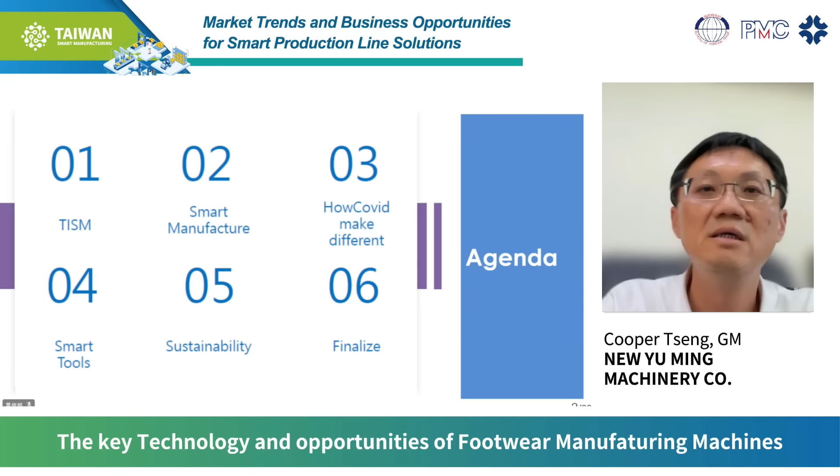I will talk about TISM, smart manufacturing, post-COVID development, smart tools, sustainability of our factories, and conclusion.

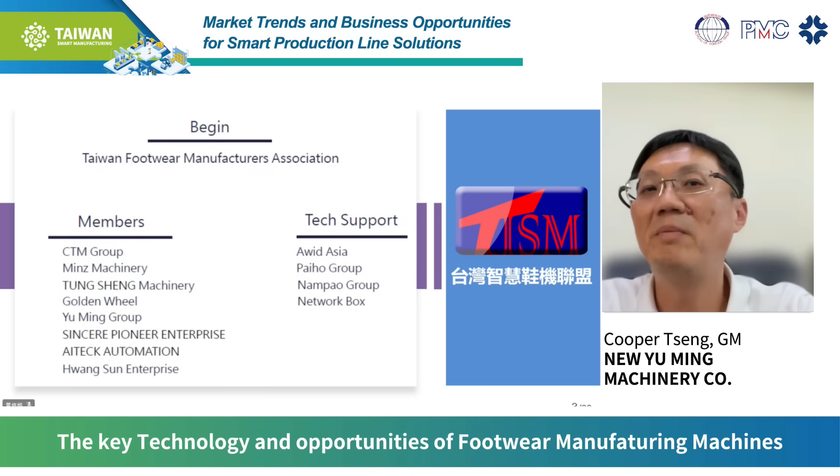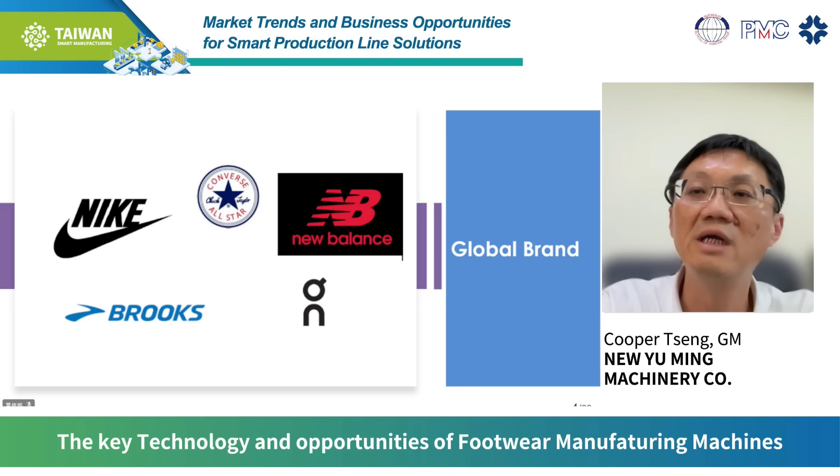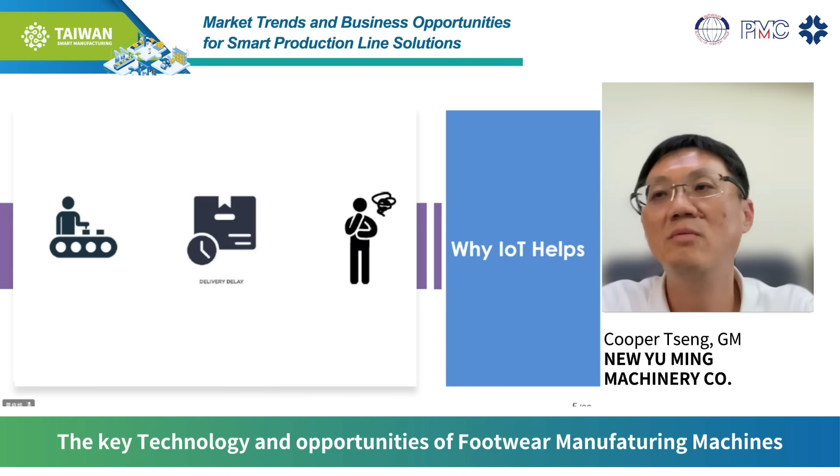Currently, with Nike, Converse, New Balance, Brooks, and On Running, we all have projects going on. And in the future, how can we help you, and why should we help you? I will explain it to you.

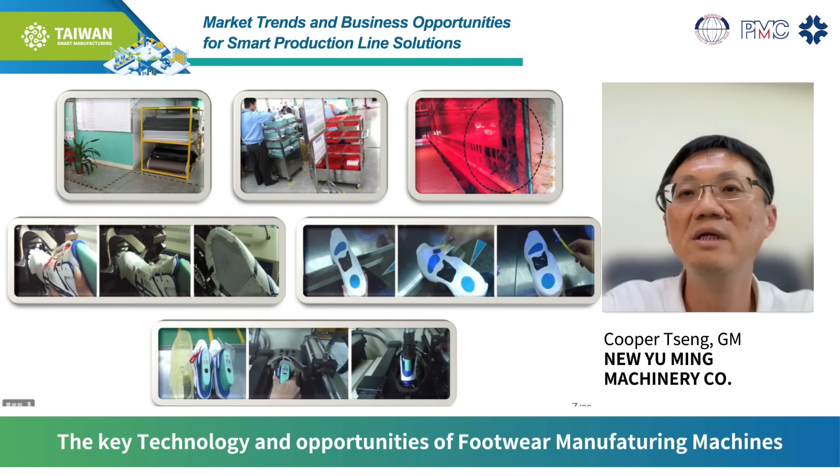Currently, shoes manufacturing factories have encountered a lot of questions, such as water consumption, conveying belt examination and cleanliness, and how can we reach standardization in our industry in the future? These are the questions we are facing now.

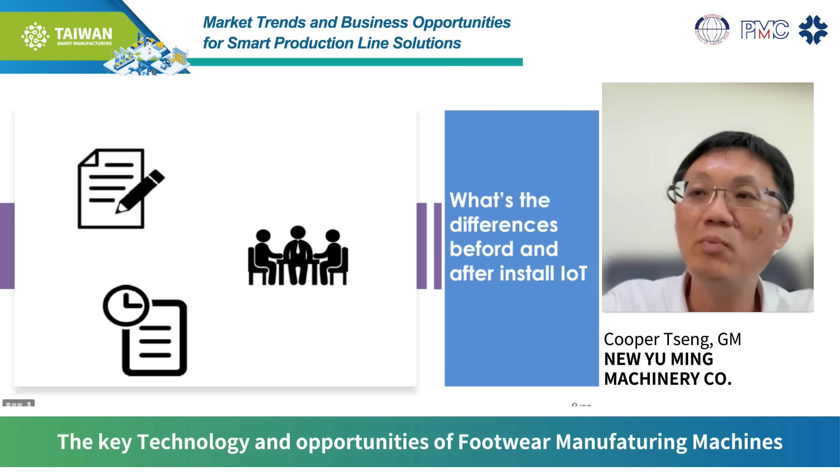In terms of IoT, before and after the installation of IoT, what are the differences? Let me explain briefly.

Currently, in our production lines, there is a question: production and planning are not connected. On-site data is not real-time and accurate. Especially in our production lines, we are still using manual methods to record data.

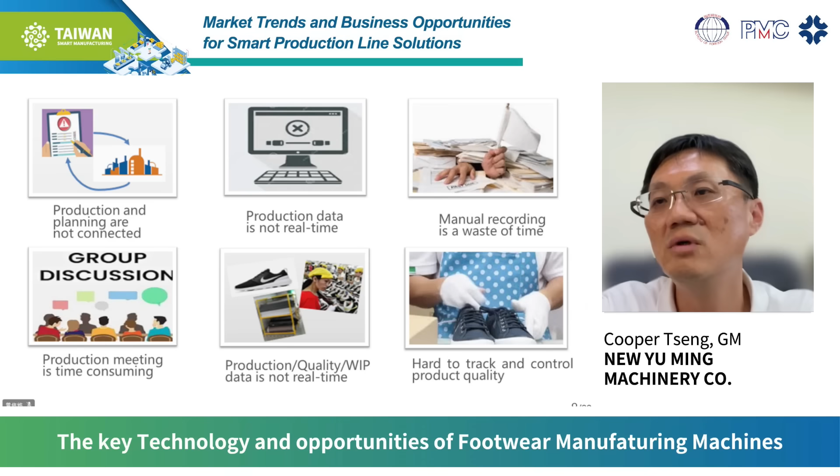It's time-consuming. In terms of coordination of our production and planning, we need real-time data in terms of production, quality, and materials. The most important thing in our production line is quality. How can we trace the quality of our products? This is the problem we are facing now in mainland China, in Southeast Asia, and even in India in the future.

The IoT Smart Production Line. In terms of IoT Smart Production Line, currently, from cutting to stitching and to lasting machinery layout, we have accomplished 22 production lines, including those located in mainland China, Vietnam, Indonesia, and Taiwan.

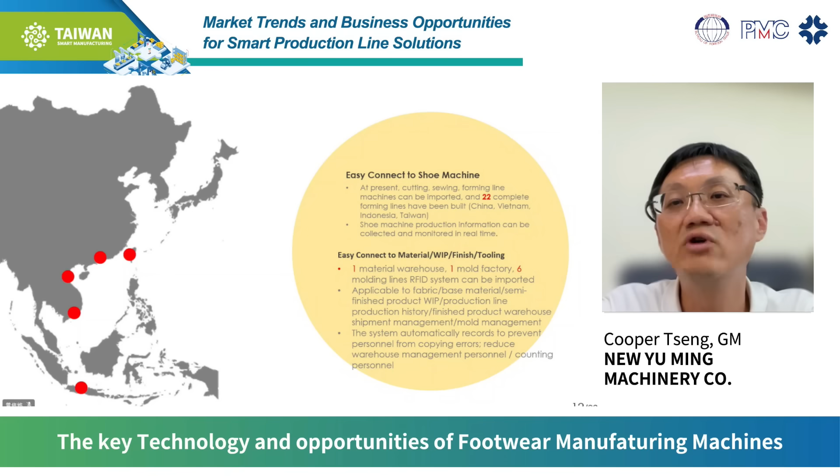We use a WIP online system. The system can record all information automatically to prevent human error, to reduce inventory and other labor force. We can reduce the indirect labor force.

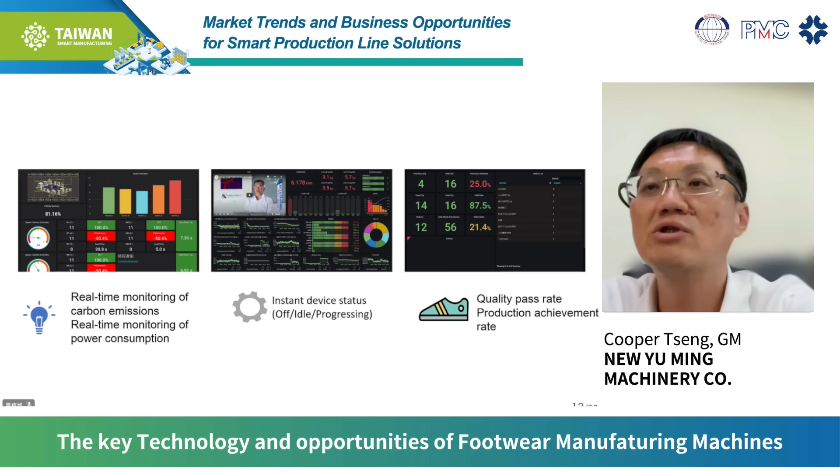In those 3 screenshots, the left one shows real-time monitoring of carbon emissions and real-time monitoring of power consumption. The middle one shows the instant device status. From the right one, we can get quality pass rate and production achievement rate. They are all the data we can get online right now.

We can get our machine's operational data such as speed, temperature, pressure, etc. Whatever information our clients want to know from our production line, we can present it digitally. As to our production movement, such as accumulation, material shortage, and even line balance, we also have the information.

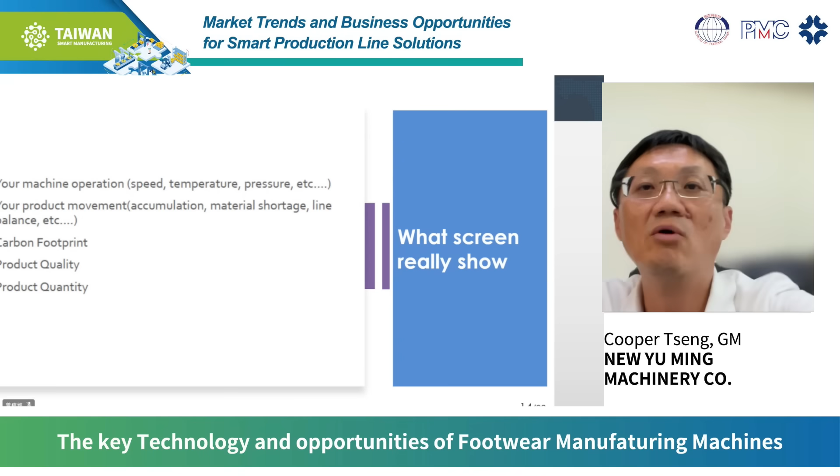Currently, in terms of carbon footprint, product quality, and product quantity, we can present the data. That's the reason why we create the war room in our app.

What can we achieve with the IoT smart production line? Aside from the remote control system of our machines, we have material data management. It's very important for the shoe manufacturers. We can provide production data optimization analysis. In our production line, we have a production line monitoring platform, such as the maintenance data and TPM. They will all be included.

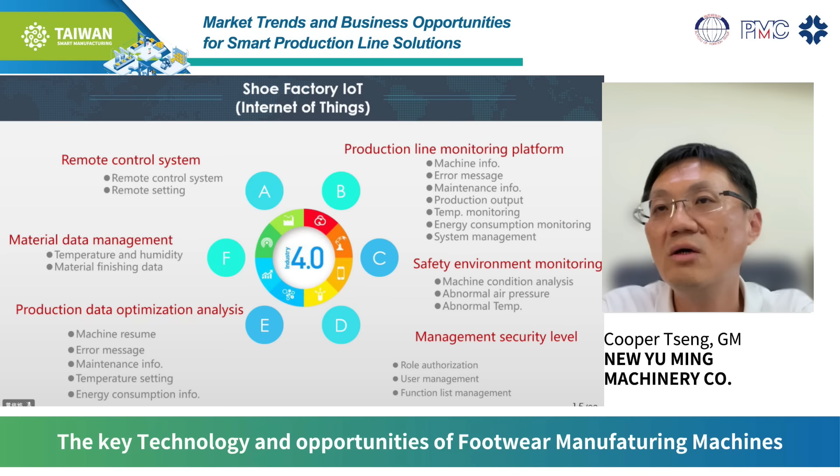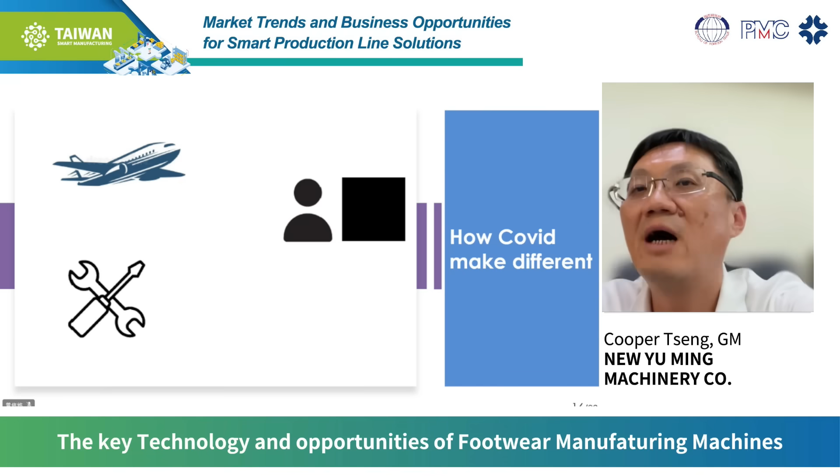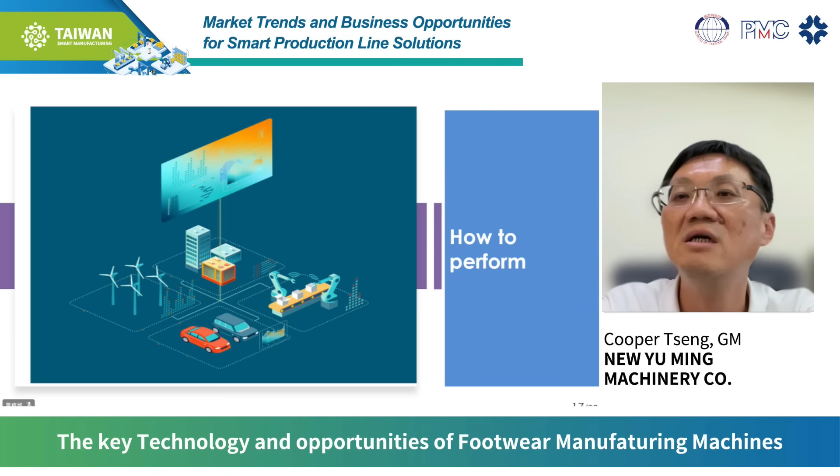In terms of the post-COVID era, what differences have we made? The following are the differences made in the IoT smart production line which are different from the past. In the future, how can we put them into practice?

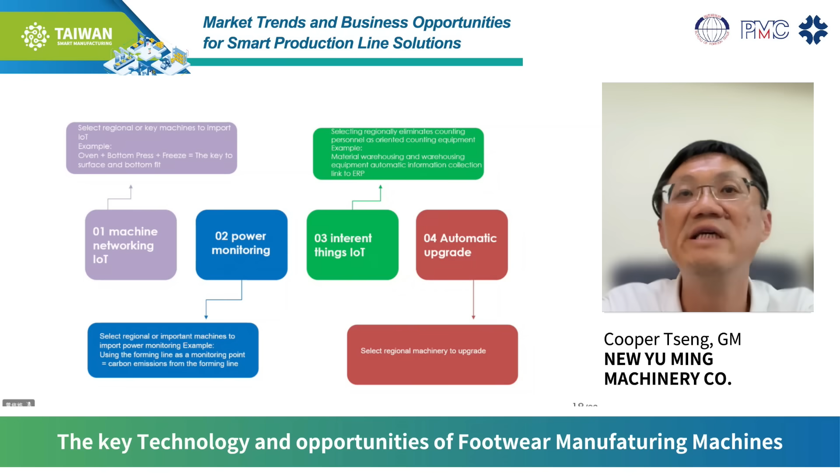Through real-time monitoring and IoT, we have upgraded our automation system. Aside from that, we have already connected to the warehouse automation system and ERP system. With the ERP information, we can better control the whole system.

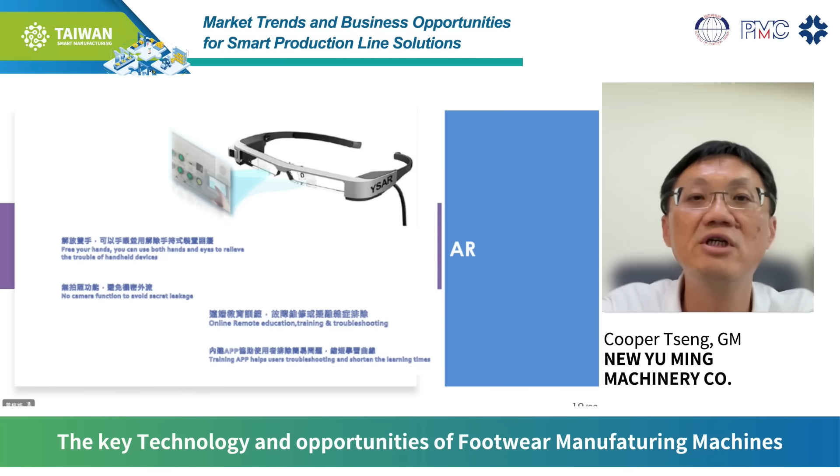Because they are all done remotely, we created an AR system for such as new machines and for training as well. It's a built-in app which can shorten the training curve for newcomers. This is what every shoe factory wants us to establish for them.

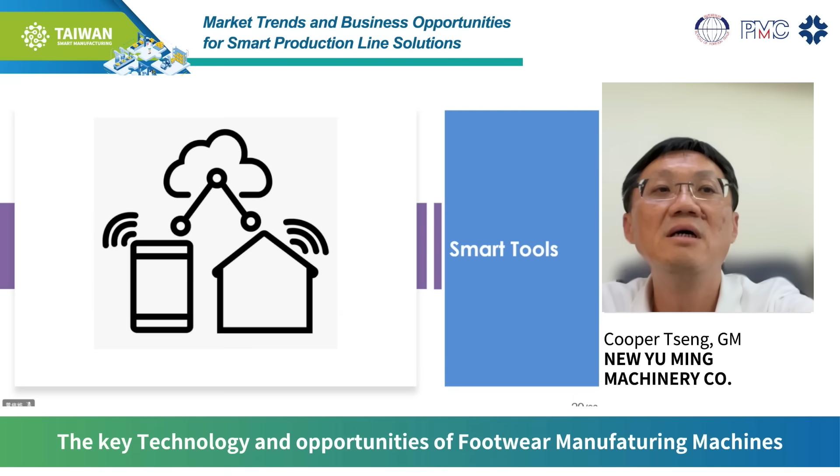In terms of smart tools, for instance, we are using RFID to provide automatic identification, starting from material input to storage management, the shipping of the product, and ERP's management of the product - packaging, assembling, even cutting and stitching, and printing.

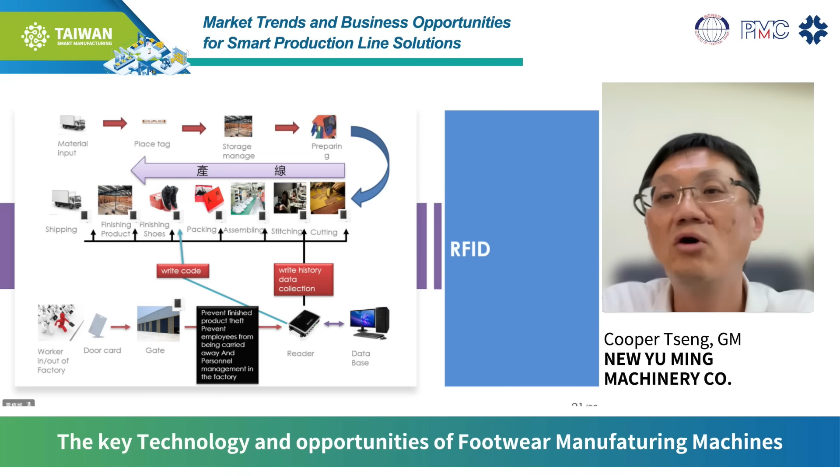Next, it can also provide security service for the factory. A very important point is that in the future, for the consumers and the client's warehouse, we can provide very good tracing information. And we can provide more exact control of the warehouse to prevent stealing from staff.

Next, in terms of RFID for warehouse management, you can see from the slides that not long ago, we established the RFID system for a mold factory in Vietnam. Typically, a mold factory has 3 or 4 warehouses containing up to tens of thousands or a million molds - upper molds and lower molds. In locating a certain mold with RFID, we can save time for them, from 3 days in the past to 2 hours right now. Everyone was amazed by that.

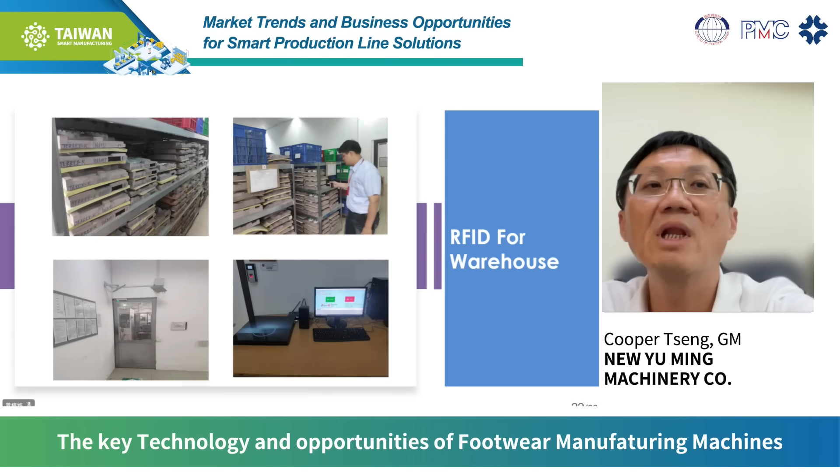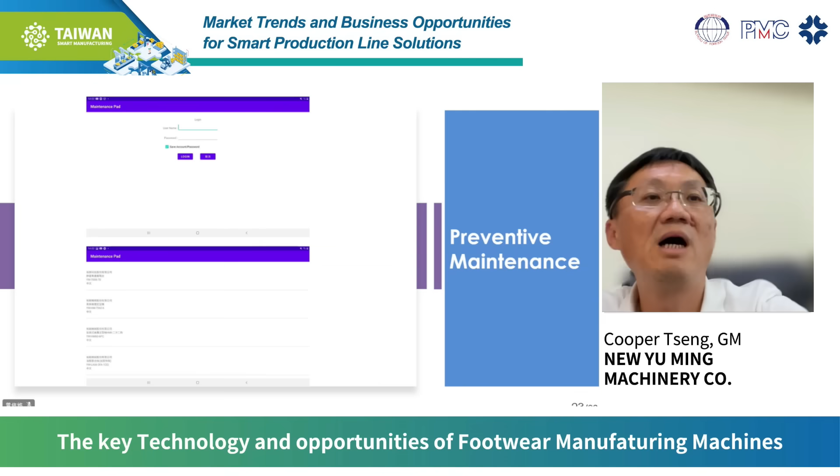As to preventive maintenance, we have created a system for it. Next, we have created a Line Alert app for machine maintenance. On each machine, there is a smart box which can transfer the machine's conditions to the app, such as when and what RFID has passed the machine with the conditions. On the left of the screen, you can see you need to do maintenance - what kind of maintenance. On the right, such as production line number 1, which machine has an abnormal situation.

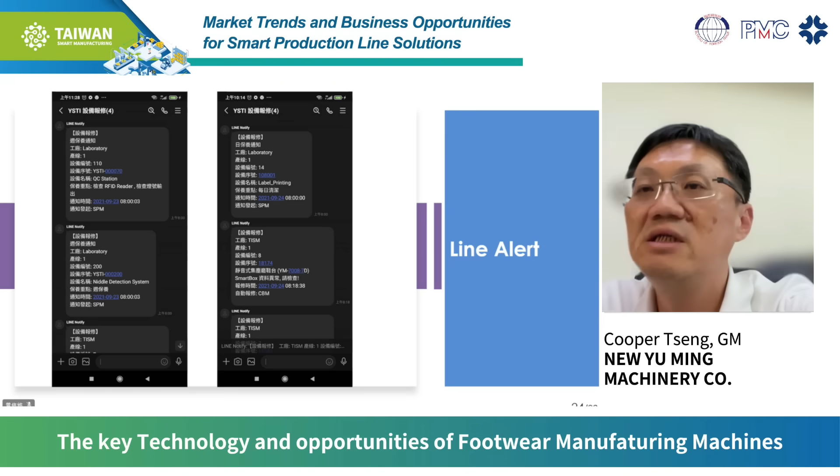This is an advanced system to reduce human error and provide real-time interaction. Next, by using an automated guided vehicle, AGV, we came up with a very good idea. With AGV, we can standardize our labor tempo to reduce workers' human errors. Otherwise, it will slow down our production line speed. It can maintain the speed to keep a good OEE and reduce fraction defective.

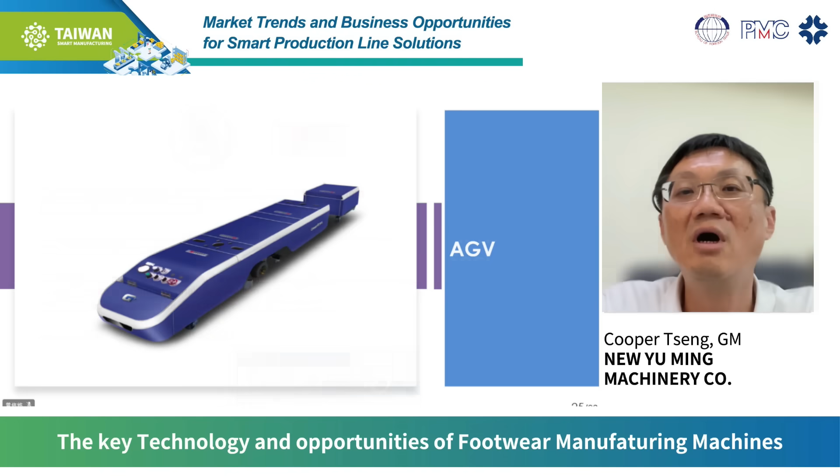Next is Internet security. NetworkBox is a global leading Internet security company. It provides the best and most comprehensive solutions to enterprises. NetworkBox has passed ISO 27001 certification. On the 24th of last July, it secured the security of our network. Right now, we have 28 Internet Defense Centers.

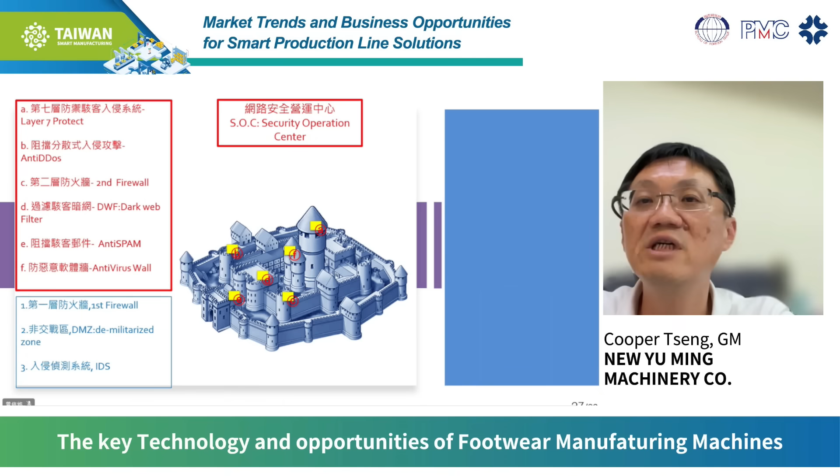So we will continue to support our IoT security project. This slide shows that we have established 7 layers of protection to prevent Internet attacks. This is our Security Operations Center, SOC.

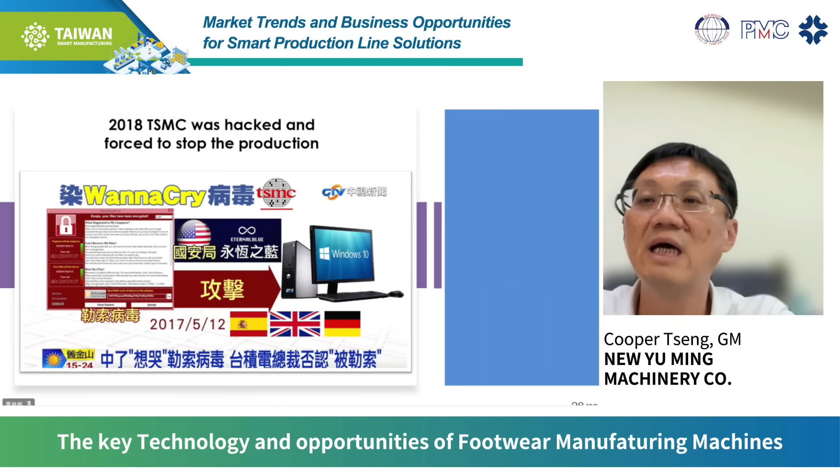In 2018, TSMC was hacked and forced to stop operation. It suffered great losses. So we established SOC, the Global Defense Center. This is our information room. It collects real-time information and shows it on the screen. They will prevent hackers' attacks.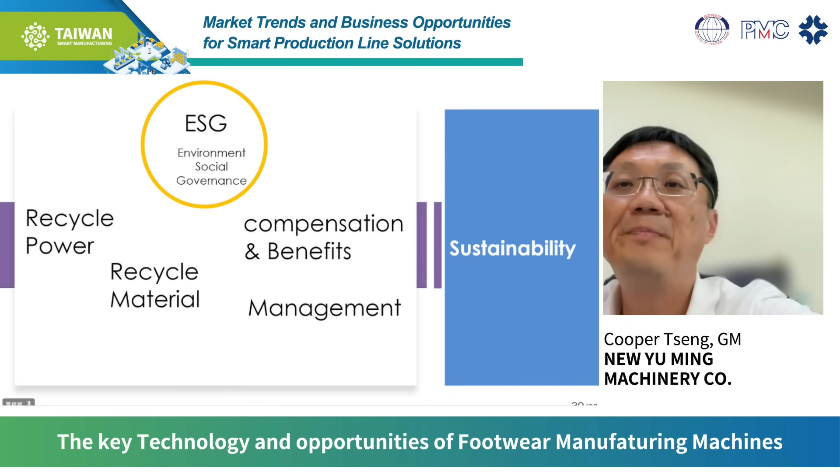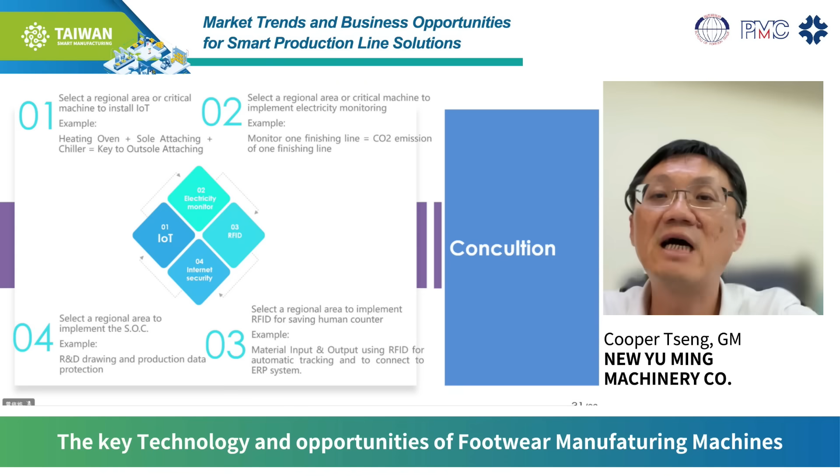Judging from what I have presented, you will know the future development of our shoe manufacturing industry. Now it's our common goal. If you need any help, please don't hesitate to contact us. This is my presentation. Thank you for your listening.